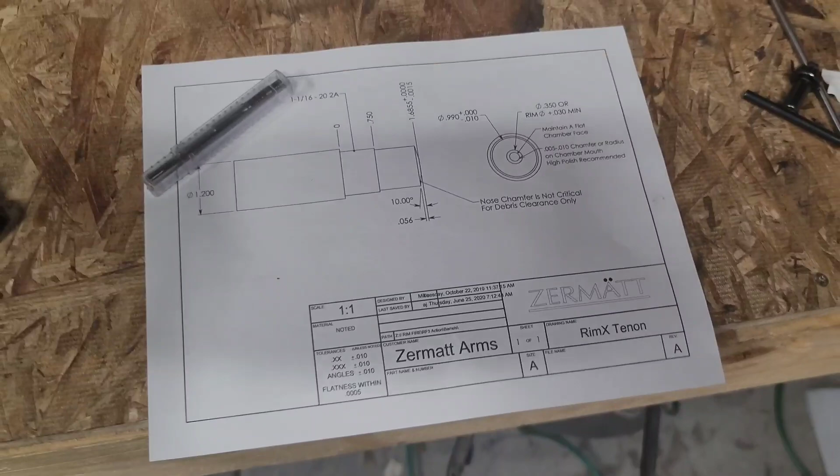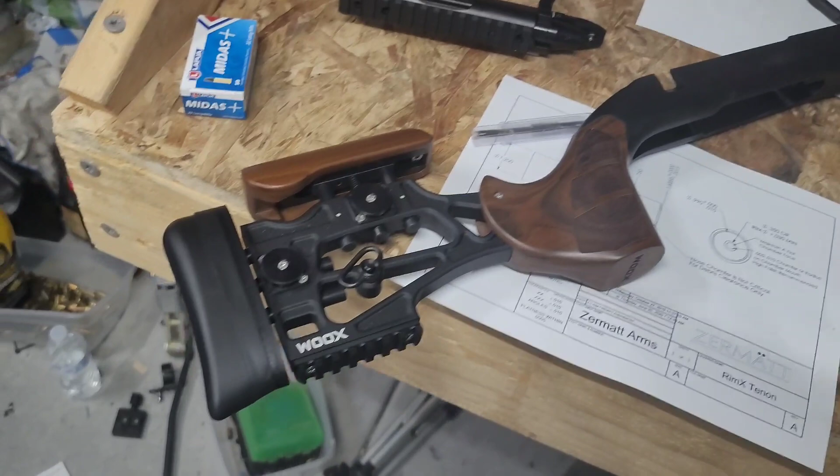We are going to be playing around with a Zermatt Arms RimX action, building an NRL 22 rifle, and using this action, which is a phenomenal action the way it feels. And we have a pretty cool looking chassis as well from WOOX. WOOX is actually a Manelli brand. This is a Furiosa chassis, so check that beauty out.

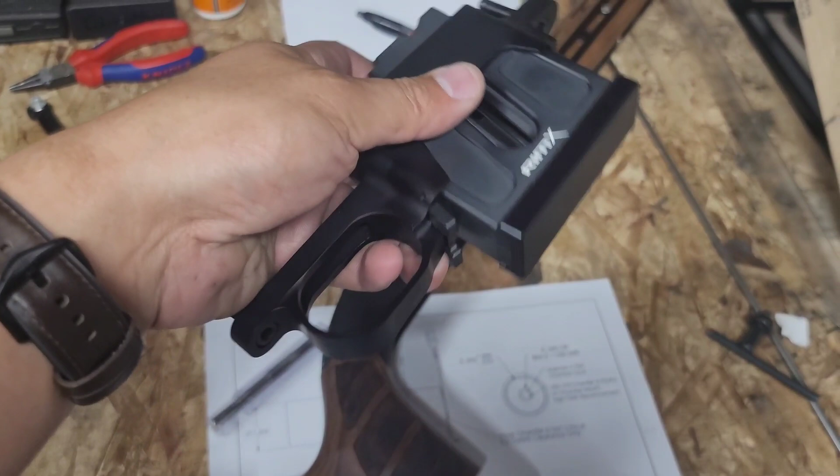So I'm pretty excited to put this all together. We're building a NRL 22 rifle with the RimX action. It uses a proprietary kind of AICS pattern bottom metal, and we'll be building this thing to chamber up the Midas Plus or the Lapua Center X ammunition using this brand new reamer from Dave Manson. This is a 22 Bentz reamer.

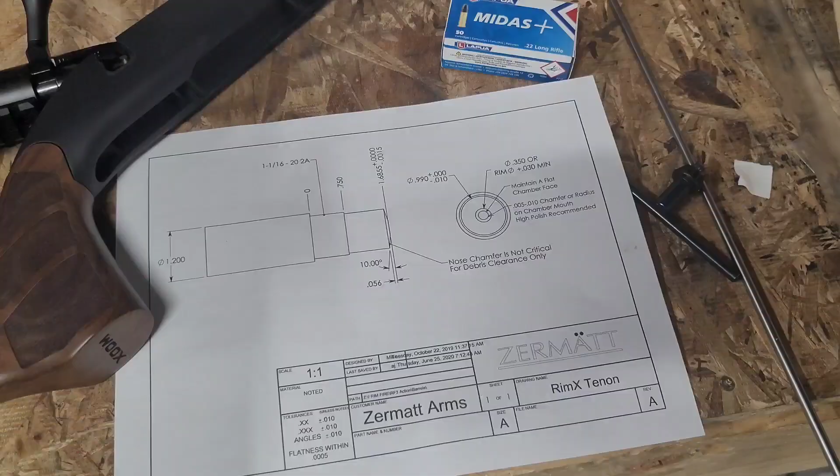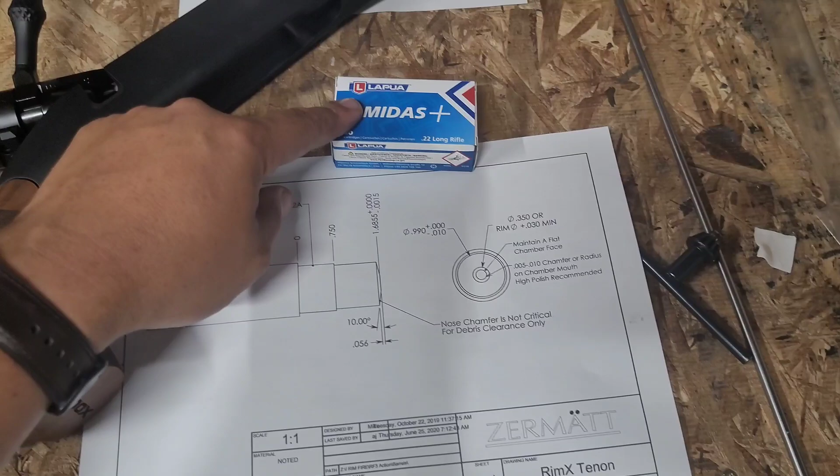I'll show you guys the process, give you guys a quick little demo on the lathe, what I'm doing. I'm doing things a little bit different compared to a center fire rifle, where you usually use a go and no-go gauge for head spacing the barrel. What I'm going to do on this one instead is actually head space the actual barrel with the ammunition. So we're building this thing to engrave the ammunition right around 1 or 2 thousandths on the bullet, because primarily this rifle will be shooting the Lapua Center X or the Midas Plus. So let's get to it, let me show you guys the process on the lathe, and let's see how this thing turns out.

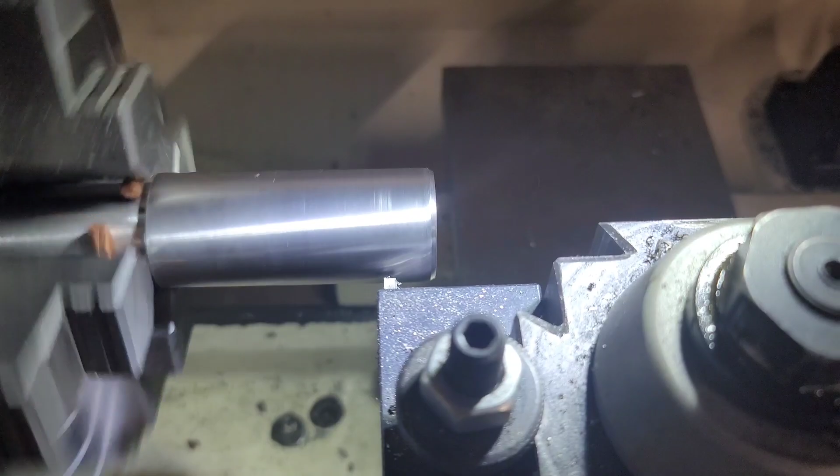All right, first things first, we've got to start fresh new on the breech end. So we're going to go ahead and cut off about 1/4 of an inch, almost 1/2 inch, and start fresh new on the face.

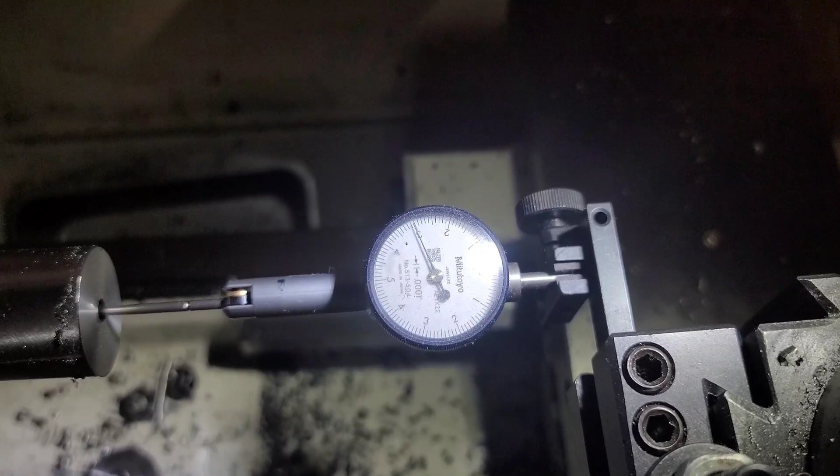Alright, so let me put the phone down. Let me put the camera down and pay attention to doing this.

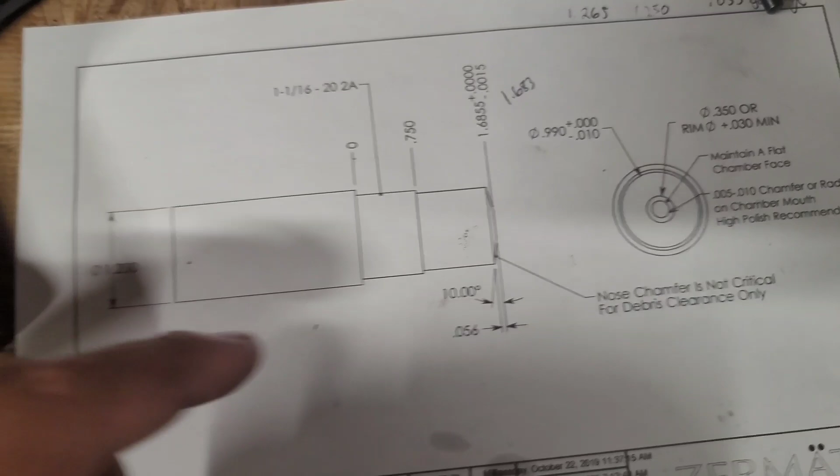So next up, we're going to start turning down the tenon measurements. The prints are calling for 1.685 thousandths, but I measured this action to be 1.683 thousandths. So we'll go ahead and cut it to 168.3 and then subtract 2 thousandths as well for the crush, so we're looking at 168.1.

Alright, so the RimX tenon is all done, and these threads are super tight. Actually, I turned this one to be right exactly on the inside diameter of that action. Let me show you here. Right on the inside diameter where it gets all super smooth, right there by the gas hole, that is exactly 1 inch and 4 thousandths. So I have this exactly at 1 inch and 3 thousandths, so it's a pretty snug fit.

You can see where that action, when I tighten it on, it was pretty much rubbing right here. So basically the idea is to get everything super rigid and super snugged up, that way all of the harmonics are dead in this section. Obviously this is where the bullet's going to fire, and any small vibration or harmonics on the 22 long rifle will affect its accuracy. So that's the theory. Having this nice and snug, I actually have these threads in a slight taper, so it's nice and loose, then it tightens up right about the last section here, making it super snug right up to the shoulder. So we're pretty much ready for chambering.

Like I mentioned, we're not using a go and no-go gauge, I'm actually using a bullet. So it's highly not recommended to do on a rifle cartridge or center fire cartridge, however, I'm pretty much just trying to tailor this barrel exactly to the bullets that I plan on using. So one thing I forgot to show is the actual muzzle side.

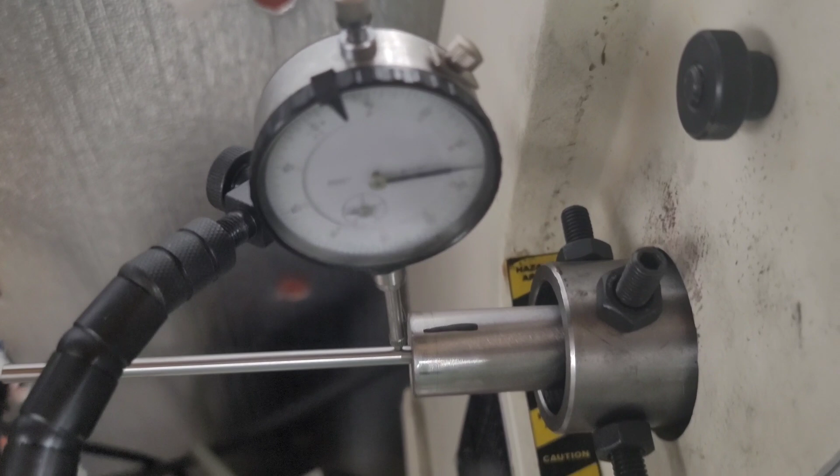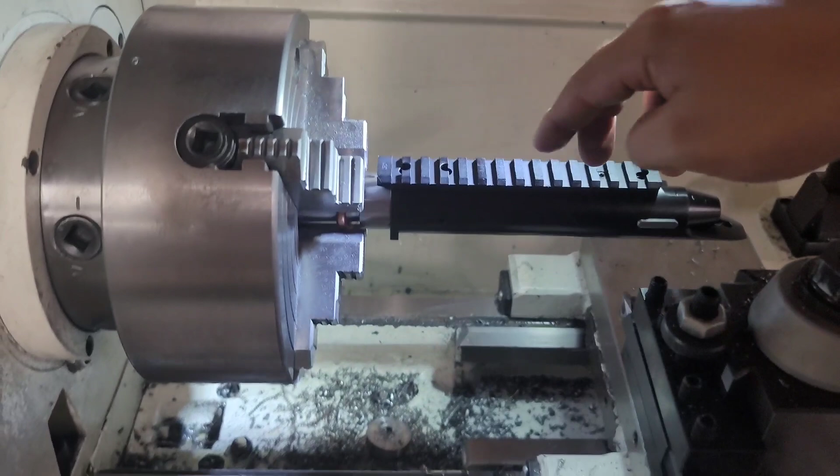I actually look for the high side of the lands, basically trying to time up the action. I have the high side set about 12 o'clock, so the curvature of the barrel is bowing down. For the 22 long rifle, I'm going to play around with this. Instead of having it bow up for more long range, I'm going to have it bow down to be more consistent at those shorter ranges, 50 and 100 yards, which is where the majority of PRS or NRL 22 targets are. So that's my theory on that one.

But there's one thing I do for a lot of these precision builds: I time the barrel, the curvature of the barrel, either at 12 or 6 o'clock.

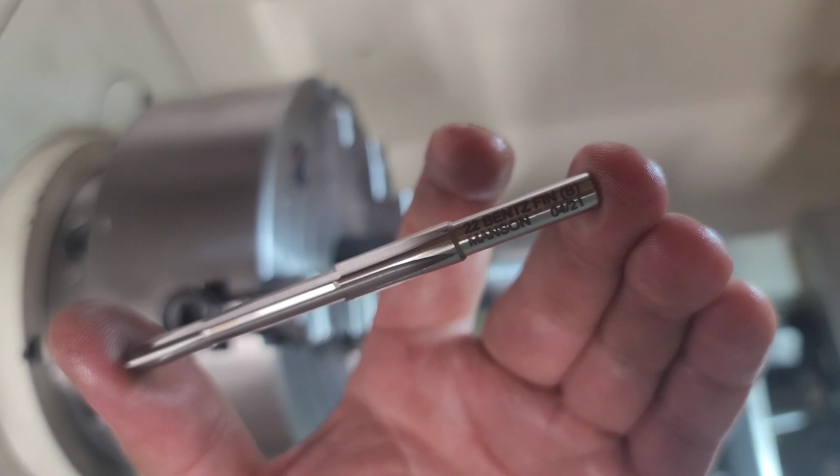The chamber we're cutting is called a 22 Bentz. This is from Dave Manson. In fact, there's about three pages of reamers listed for different leads and angles and all kinds of stuff for the 22 long rifle. On recommendation from Zermatt Arms, they suggested the 22 Bentz, and this is a fresh new one from Dave Manson. Pretty small reamer. I'll give you guys a rundown of how I have this thing set up.

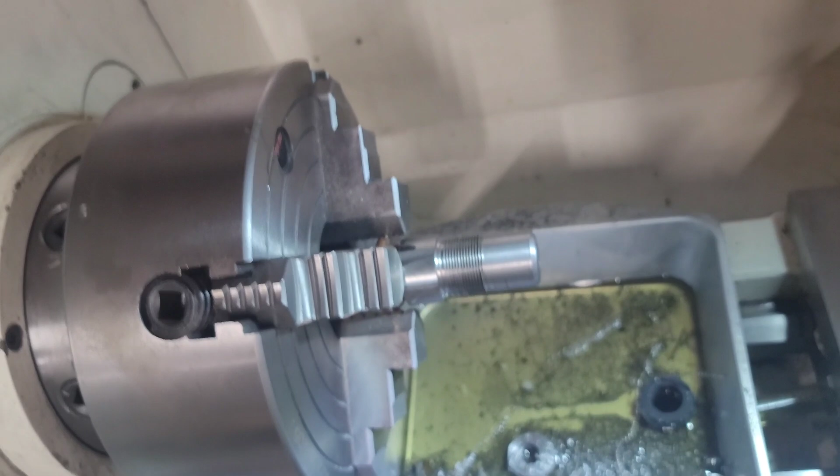I do have a barrel through-bore flush system. Basically how this works is it spits out a reaming oil, Hangsterfer's PC46, a specially designed reaming fluid, going through the bore itself using the Criterion Barrels through-bore flush system. We'll go really slow, chambering this at about 70 RPM. Like I said, it's not going to take long. The main thing is getting a perfect finish, and that's exactly what this bore flush system does.

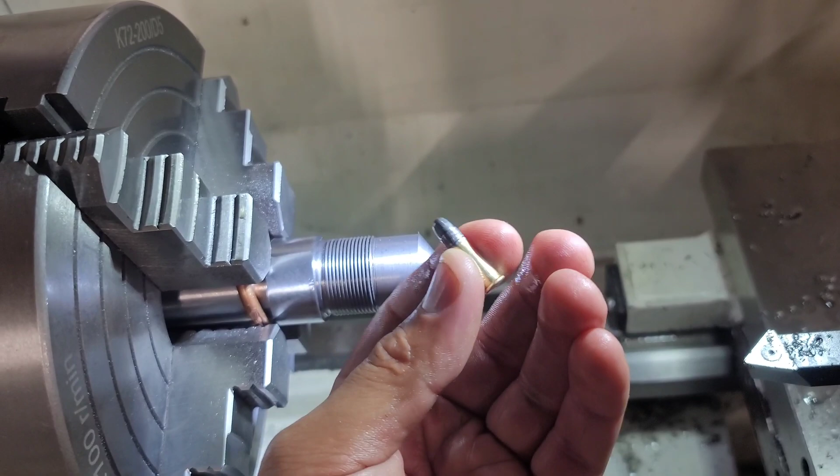Headspacing this barrel was actually extremely difficult. Now I am using a live round, so it's definitely not recommended to do this. My lathe is pointed in a safe direction, but like I mentioned, I'm trying to build this barrel to fit this bullet itself. The case head protrusion I measured here was 53 thousandths, and I wanted about 2 to 4 thousandths total.

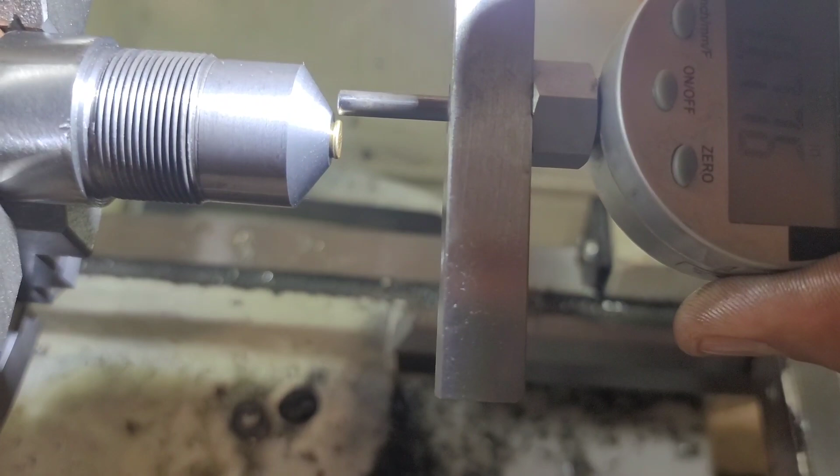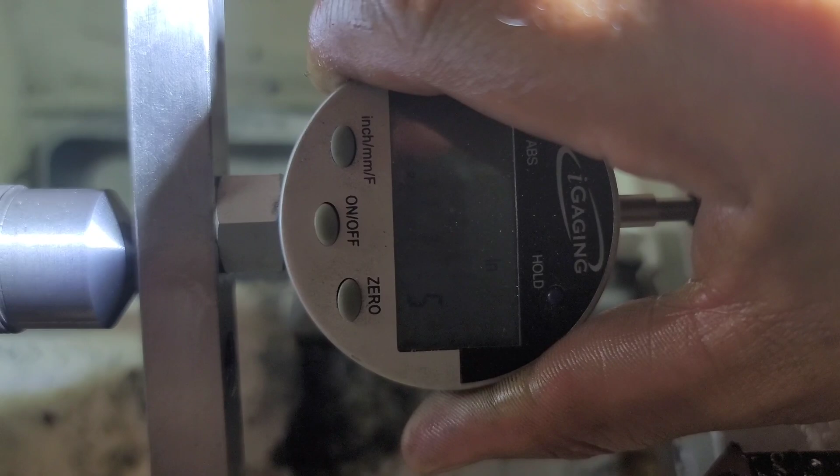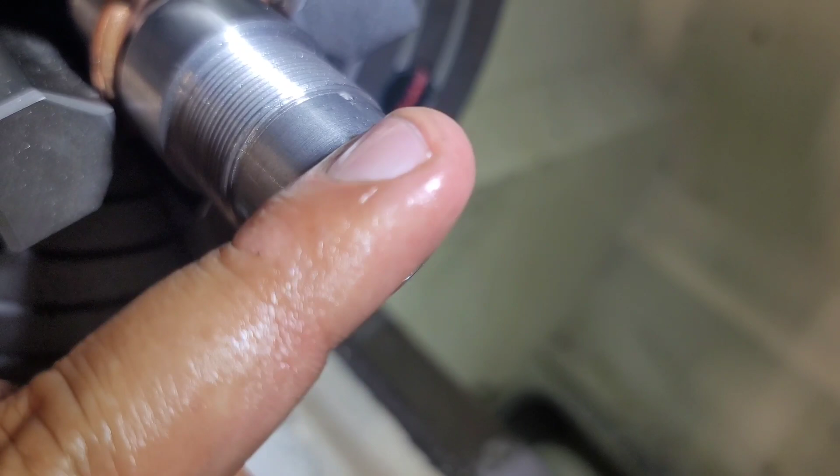You can see how I beveled the barrel there for the contour. That bevel allows the actual extractor to grab — the little extractor on the bolt will grab right about here. The prints call for 350 thousandths on the little flat face, which is exactly right here on the print. It says 350, or the rim plus 30 thousandths minimum. So I just went with 350 thousandths.

So let's get this barrel finished up and get this thing on the action.

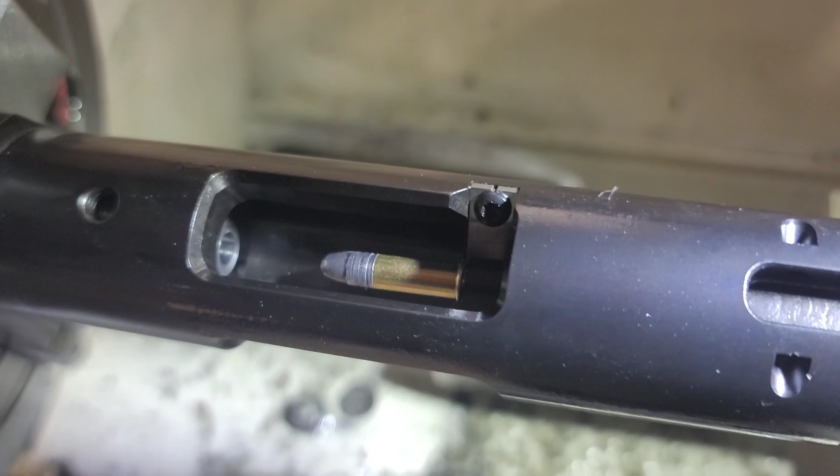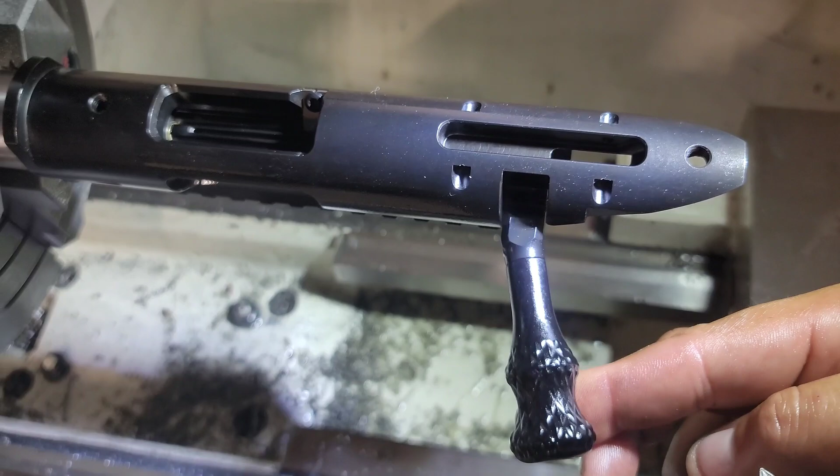Here's the moment of truth with the headspace. I do have the firing pin removed, so this action is safe even though this is a live round. Basically what we're looking for is a little bit of resistance — and there you go. I can feel it right there, engaging the lands, and it's still going to eject really smooth. I'd call that a pretty good headspace. It's engraving the bullet just like it should, and I think this is going to give the best accuracy.

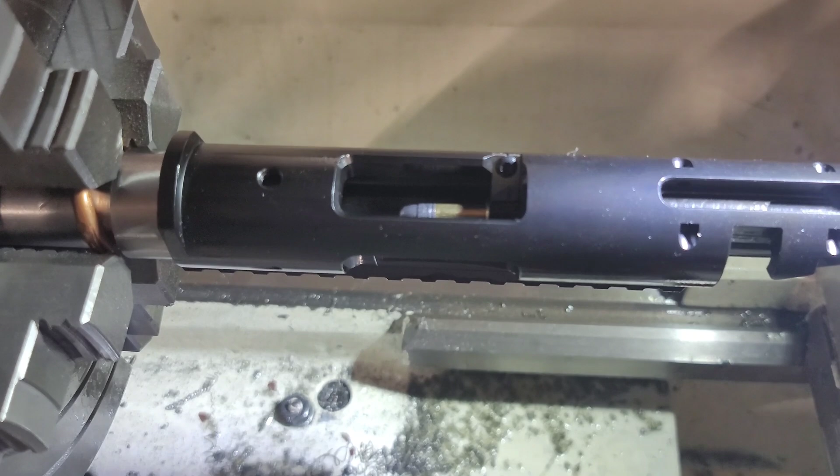Let me finish up the contour of the barrel. So basically the tenon, the headspace, everything is done right. Let me go ahead and inspect the actual chamber job itself, and then after that I'll give it a slight bevel on the breech end here to give it smoother feeding.

Right there you can see where it kind of jams up a little bit. But there we go, yep — and then obviously control round feed.

Pops it right out. So let's check out this chamber job.

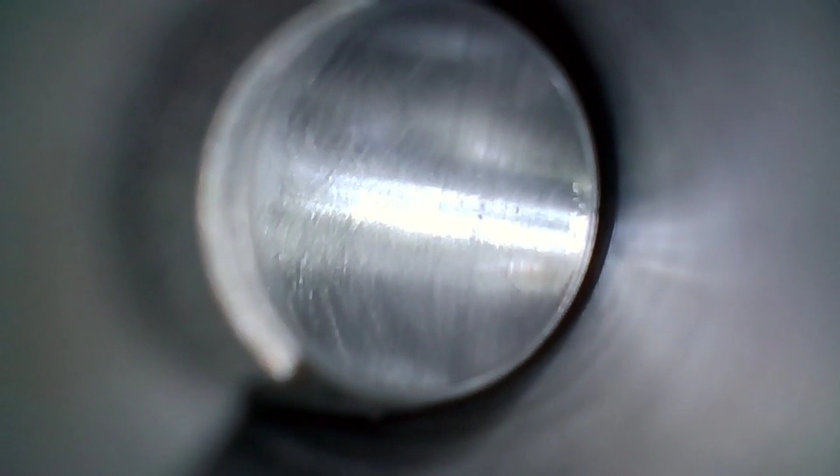Starting here at the breech end, you can see the scuff marks from my 500 grit sandpaper, and just some very minor tooling marks. Like I said, I really didn't go too far with the sandpaper. I didn't want to get into the lands and grooves.

But here's the moment of truth. We want to make sure all these lands and grooves are nice and uniform and straight, and that's exactly what I'm seeing. Now this Douglas barrel is a 6 groove design, a micro groove design. So making these lands and grooves as uniform as possible indicates that the chamber was cut as straight as possible as well.

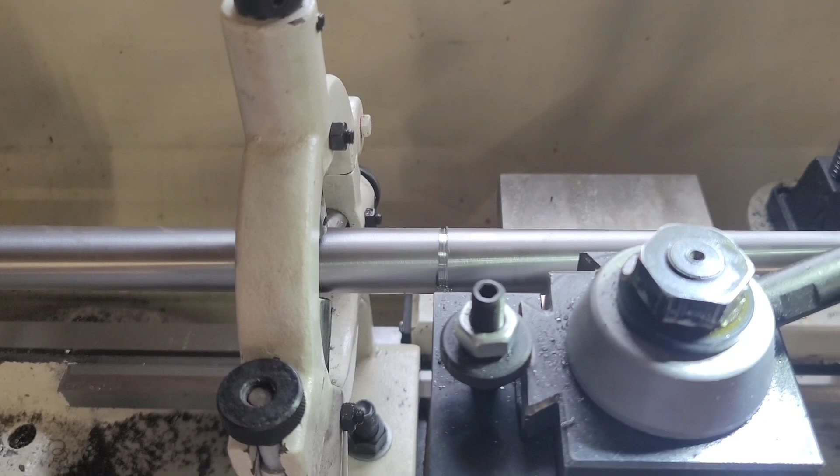So that's what I'm seeing here, and I think we're good to go. Alright, so I'm starting to cut the crown using a steady here because the barrel is now too short to go through the headstock. So I'm going to basically part this off and cut a crown.

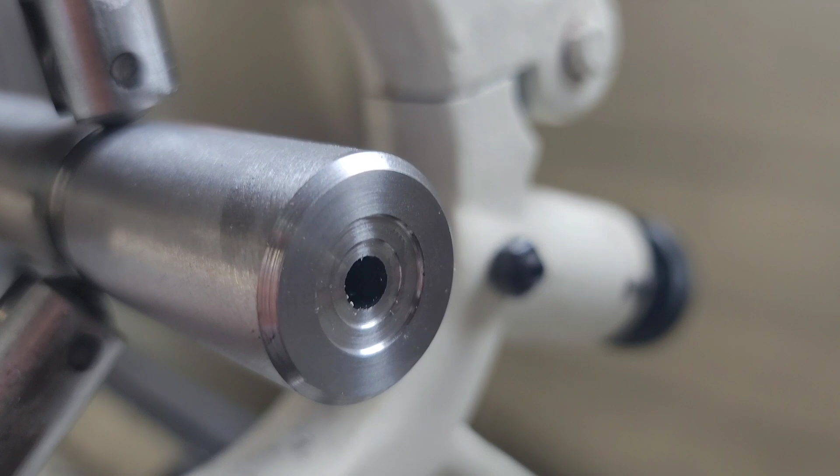So here's the crown. I did a 3-ring crown on this one. Kind of helps mitigate the gases and make them come out exactly uniform. So the inner circle is actually 11 degrees and then the outer circles are 90. This helps mitigate the gases and gets better accuracy in my opinion and experience. And then we did an outside bevel to help with the PRS barricades and keep it from snagging.

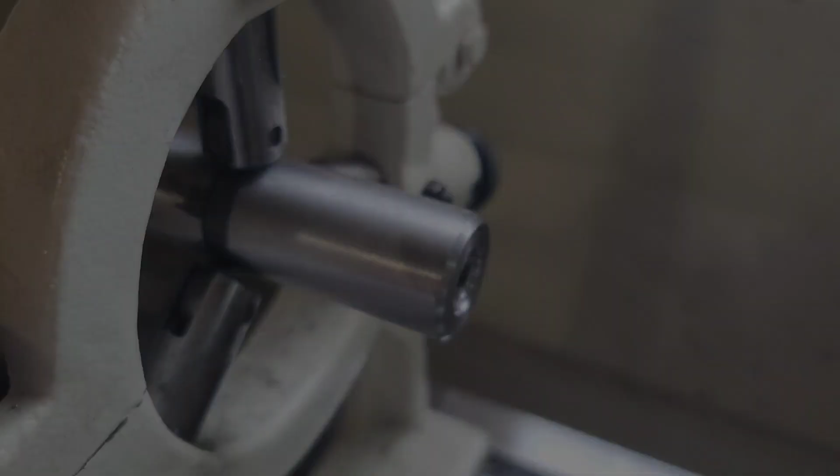I am using the Arken SH4 Gen 2 scope for it for now, and I did add an Arca rail to use my SkyPod. So last thing's last, let's check it out downrange.

Alright, so I just finished up breaking in the barrel right at 50 yards, shooting to my bullet trap over there. Yeah, I know there's things in the way, but I know where these bullets are going, and this thing is pretty damn accurate, so let's check it out.

Okay, so this was CCI Match Subsonic 22. I shot that, and then I went to re-zero the rifle with the Lapua Center X. So that's the group there, 3 shots.

I then shot some CCI Standard Velocity, which is the typical plinking ammo you get. I was actually aiming here, but it went all the way over here. So that's not a bad group.

So that's a stupid accurate group. Sorry for a little echo there, but yeah, that's pretty impressive. So that's the first 30 or 40 rounds down that barrel, and it's just getting seasoned.